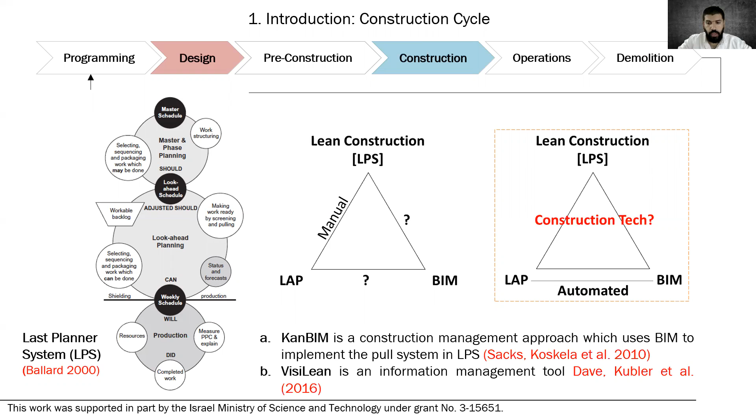So what work has been done related to this subject? What construction technologies have been used for what purposes? Technically, construction technologies could be used for data gathering from site to BIM, or it can be used also for information transfer from BIM to the site.

Today, there are tens of technologies and innovations with different applications in the construction field. These technologies are known as construction tech. Computer vision and machine learning have been successfully used for construction work monitoring. Meanwhile, point cloud technology became easily applicable in a wide range for as-built data collection, in addition to other technologies used with valuable inputs into construction work.

76 research papers related to BIM and construction tech were selected after searching topics such as BIM for construction and operations control, BIM and lean construction integration for optimal planning, and construction tech and BIM integration. Much of the research found was published in Automation in Construction and similar journals and international conferences related to computing and construction.

Some use construction tech for automated site monitoring systems, field to BIM data gathering. Others use BIM for product and process information management. In a few cases, construction tech have been used for product and process information transfer, BIM to field information transfer. Data collection and analysis: field survey of construction tech companies.

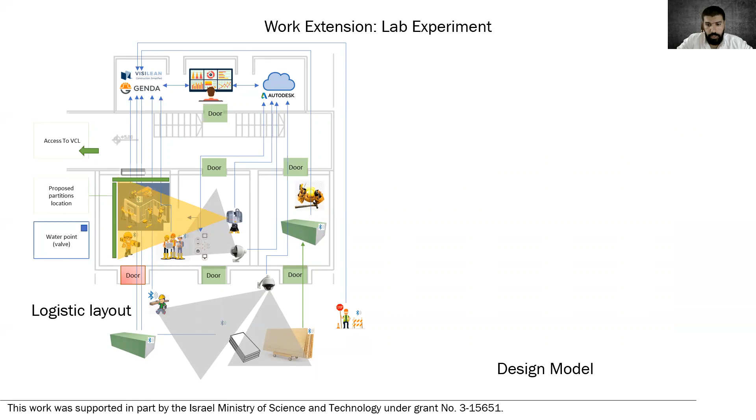This is the lab layout. It consists of the construction room, monitoring room, store, and outside working area. The plan is to build two drywall partitions. One of them represents a toilet partition with full MEP and plumbing fixtures. The BIM model up to LOD 400 is developed with the needed information. In addition, a 4D BIM file was created.

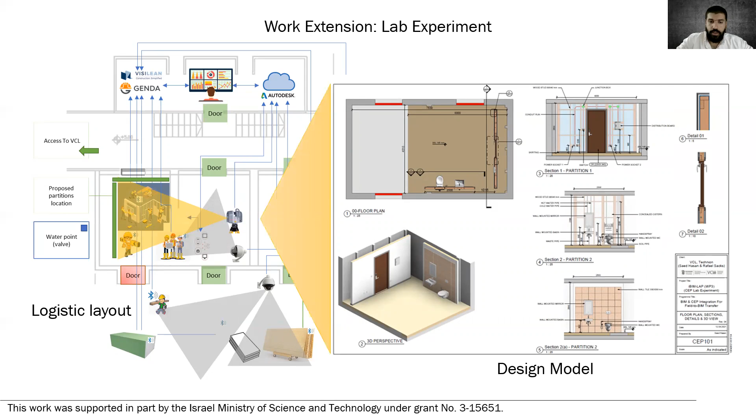From the beginning, we defined the set of proposed technologies that we can use for data collection from site to BIM and information transfer from BIM to site. We successfully integrated a laser scanning machine, projector, robot, Bluetooth sensors, video cameras, mobiles, audio recorder, digital camera, 360-degree camera, and laser projection machine.

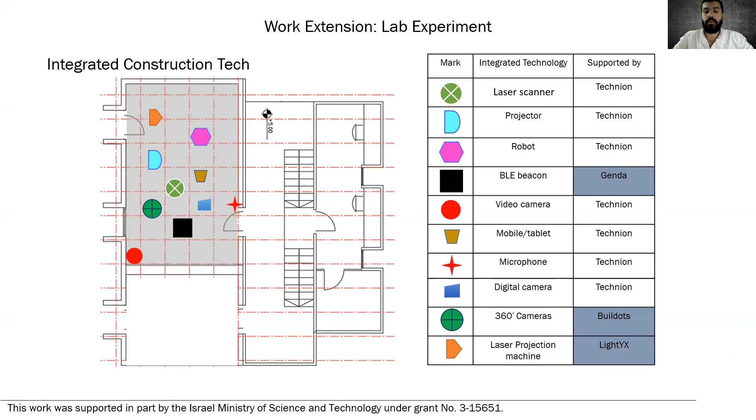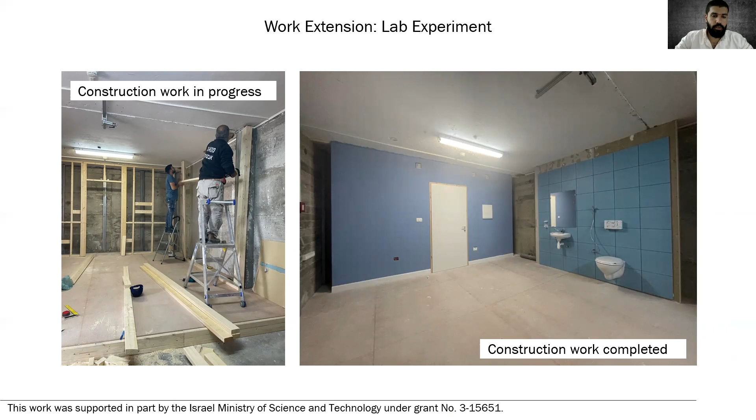So the construction work started as planned, as we see in this picture, and it was also constructed as designed, as we see in this picture. And from this image to this image, there are tons of data captured and collected from the site. How? We use a video camera for 24/7 video recording. We use a ViewSonic projector for layout transformation onto the work surface, and we can see how a worker can use the marked layout directly projected onto the surface to fix and install some elements.

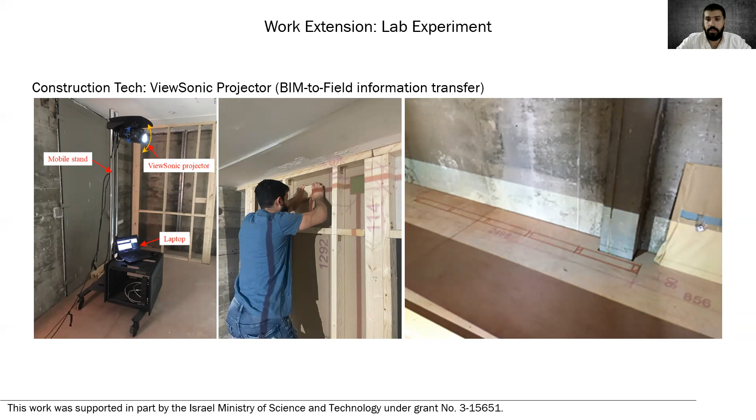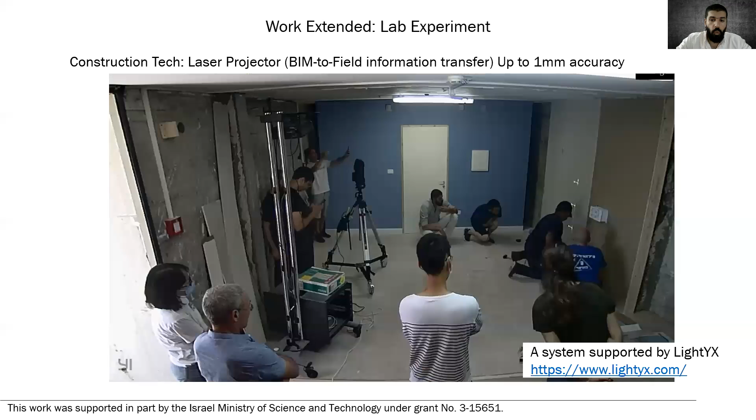We use robots for automated layout marking on the surface as per BIM information. Also, we use the laser projection machine to project the full partition layout design up to 1 mm accuracy. We see in the picture here how the worker used the projected laser lines to fix and install the wall tiles.

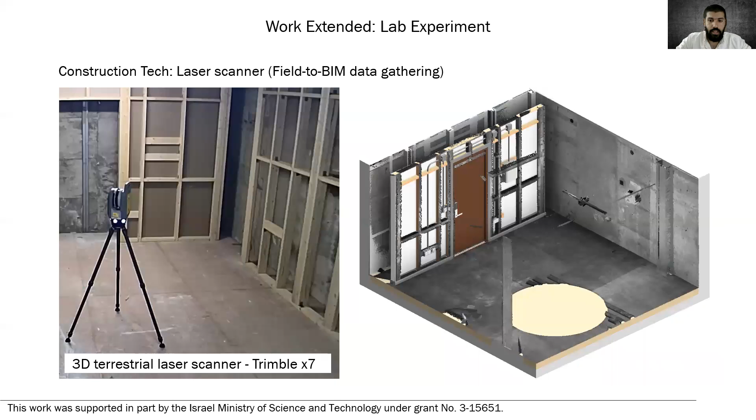Also, we use a Trimble X7 scanning machine for weekly as-built BIM production. This has been made possible using the 3D scan data received as point cloud. The site work is then analyzed and reflected in the progress model. 360-degree cameras were used to capture site progress from site to the BIM on a daily basis. This helped to follow up the daily construction progress in reference to the BIM model.

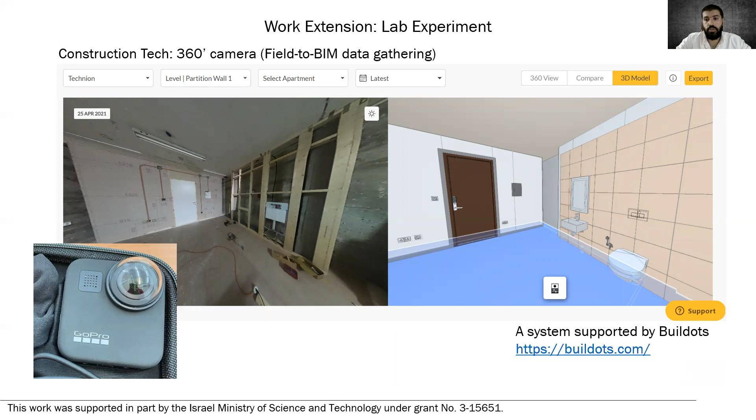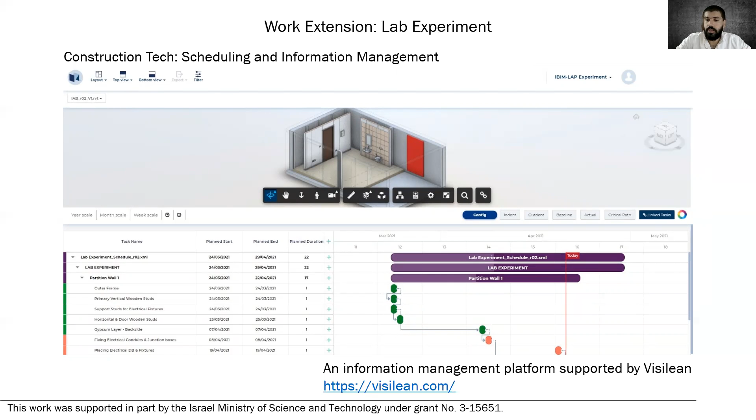The Bluetooth system also helps to track construction resources and get data in real time 24/7. This helps to measure work productivity, crew behavior, and time waste through the construction work. Also, all information related to the construction work has been managed via the VisiLean platform: site progress, planning and task scheduling, assigning the construction constraints, materials and resources issues, and others.

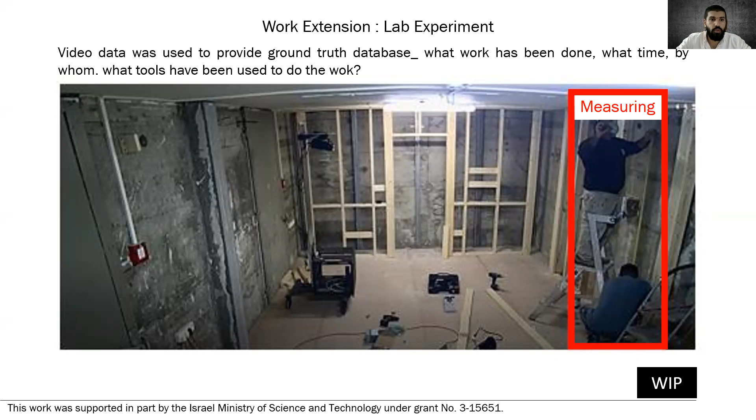The recorded video data were labeled using a MATLAB application. So the video data was used to provide a ground truth database: what work has been done, at what time, by whom, and what tools have been used to do the work. By the end of this experiment, we expect to achieve results related to the capability of each used technology to define the micro events in construction work. Micro events means start time, end time, worker, trade, location zone, tool, activity, product, BIM part, material. We will be able to measure the accuracy of detected micro events based on the ground truth database.

So what if we use more than one technology to detect the micro events, such as Bluetooth and 360-degree camera, or Bluetooth and audio record? What if we use the captured images as well? The goal is to check the capability of building a framework model based on BIM and Construction-Tech to improve construction operations by supporting look-ahead planning and decision-making processes.

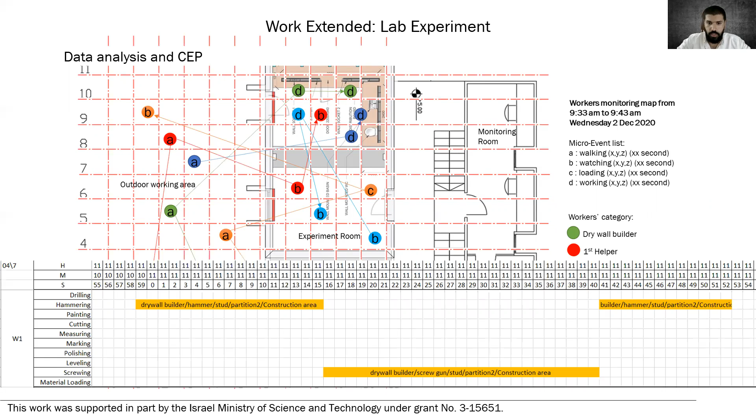As a summary, automated technologies are rarely used to support automatic information transfer from BIM to workers using either augmented reality or projection of the information onto the work surface. There is no BIM Construction-Tech framework to integrate monitoring data collected to provide meaningful and comprehensive project status information, nor for direct delivery of product and process data to workers.

Also, I would like to mention that this paper work is a background part. The lab experiment is still in progress. Currently, we are at the data processing stage. Accordingly, there is no conclusion part for the presented experiment work.